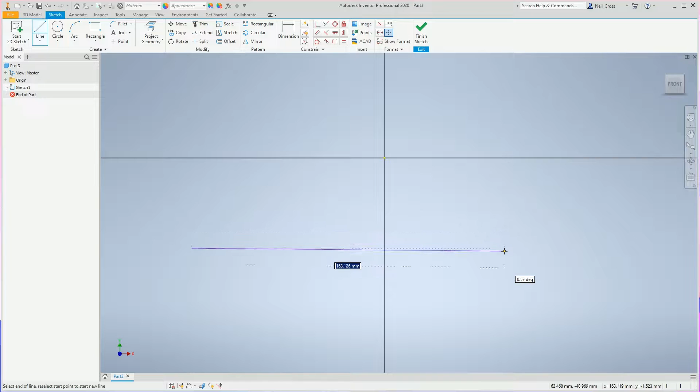I know there's quite a few people from the Autodesk Inventor team that watch these videos. Mate, please, if you get a spare moment, can you just look at this, copy what I do, and see if you can figure it out, please? Thanks, hugs and kisses. It's in the best interests of the product.

Right, first dimension is the center line. I'm going to call it 'main', so that's the name of the parameter. I don't have to do that, you don't have to do that, but it just helps reference it later on for a few bits and pieces.

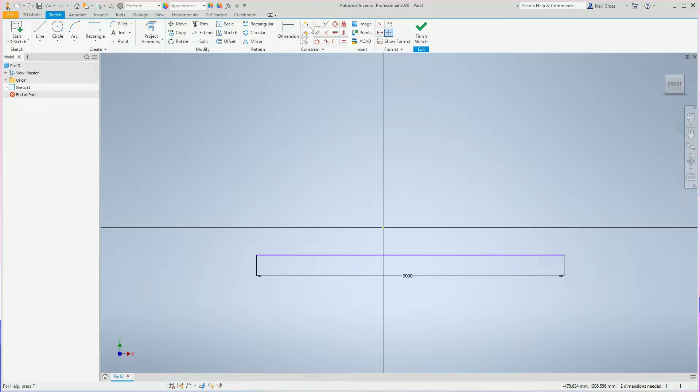So I'm going to coincidentally constrain the center of that to the center of the part, and then draw a construction line going across there. I don't need to do this either, but I'm going to link it to there so it's the same size. Don't need to, but why not?

And then it was, I think, 125. I don't even need to look at my drawing at this point, I've modeled it so many times. Right, turn off construction line.

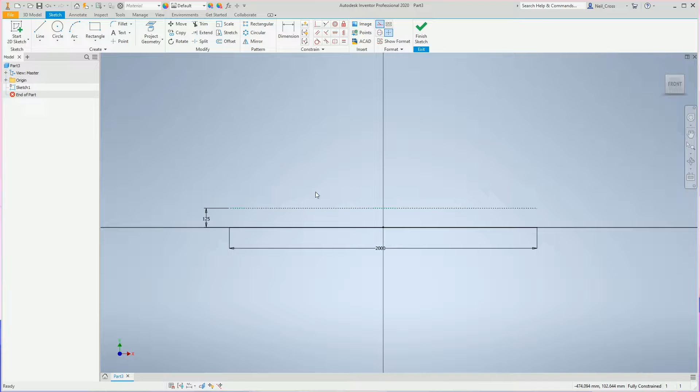I'm going to draw some arcs. This is one of the good things about Inventor, you don't need to draw things accurately straight away, you can just roughly bang things down. And I'm trying to avoid the automatic constraints it puts down.

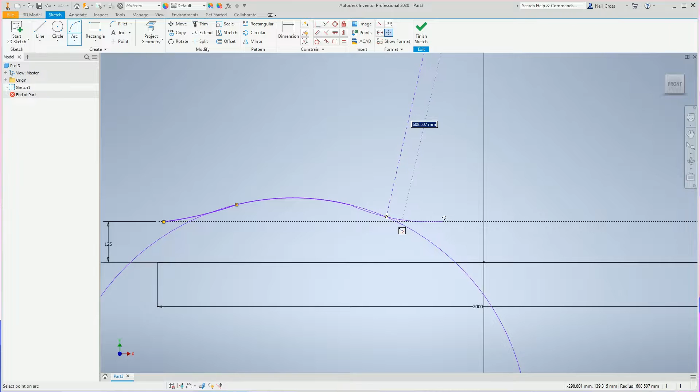I wish it wouldn't do this, this is another thing I find intolerably infuriating. What is it even doing? Why is it drawing a full circle on my screen? I'm sure there's some logic behind that, but you know what it's like, mate.

You're modeling something in the real world, in your job, and these weird things start happening, and you just don't have time to stop and figure out what the hell's happening, or if it's safe to leave it on. You'd rather it wasn't there, and figure it out later, but that later never happens, does it?

Right, so I need to join these two together. I probably should have made that one a little bit larger, never mind. So that's a bit messy, but that's fine.

I prefer to avoid putting automatic constraints down on sketches because I like to know that the constraint is there. I like to know I've put it on, I'm in control, and I'm not left guessing what might have actually happened with weird things occurring as I'm modeling and sketching.

Right, tangent between there and there. So that's the basic foundation of my first sketch, and just a couple more things I need to do. Line it up to there, and then I think that one's already done.

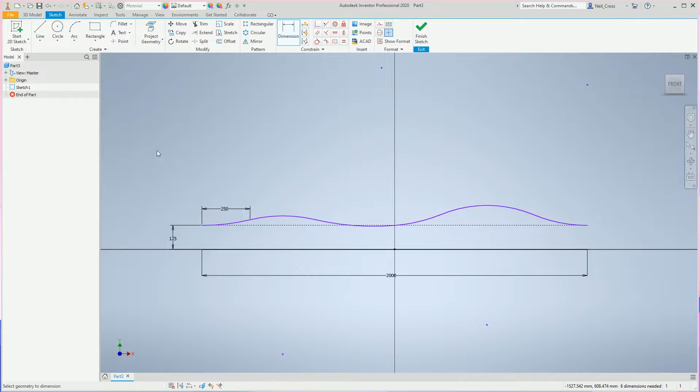Yep, right. Dimensions, so let's drop some sizes down. I think this one was 250, and then from there to there. I think this segment was 500. Oh wow, okay, that just happened.

Let's get rid of that, make it a little bit larger, and let's try that again. I hope it doesn't explode. Okay, that's the way it goes, mate, that's the way it goes.

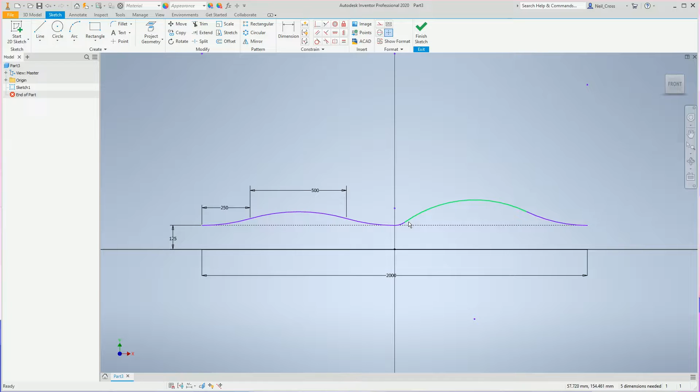I'm getting quite agitated as I'm doing this, and it's my bloody sketch, I came up with it.

And then that's 250, you can just link that. I think that's all I need to do, because I can now drop down the radius of 500 on there, and things start shaping up.

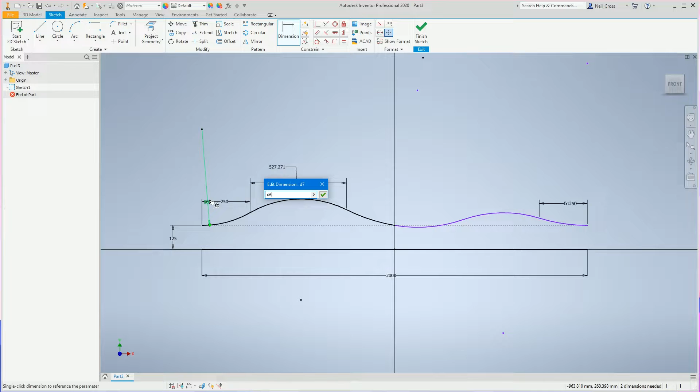And then you're also 500, so that's all black, that's good. And then you're also 500, you're also 500, and then we're all fully constrained. That's all I needed to do.

Right, finish him. Stop zooming in, please, didn't ask for that. Right, revolve.

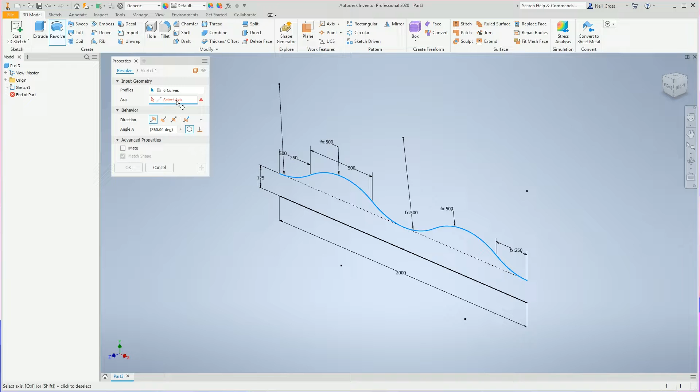Surface revolve, I'm going to revolve this profile around that center line, and then okay, right, that's the construction body for the center coil.

If you've got no idea what I'm doing, it's fine, just bear with me, it'll make sense at the end.

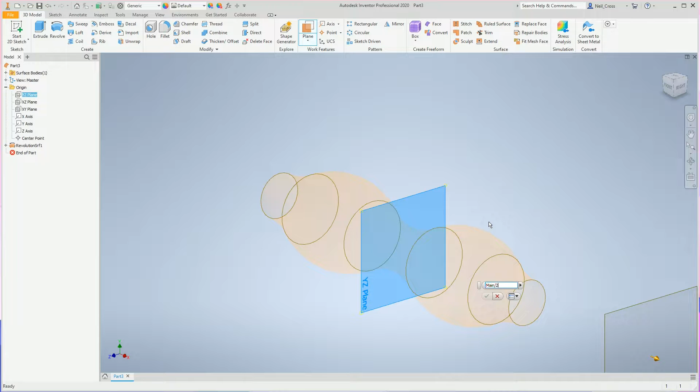Right, I'm going to float a work plane off of the middle, and that's going to be 2000, which is the main value divided by 2. And then that drops a work plane right on the end, so it's bang smack on the start of that sketch profile that I did, which is what I want.

Sketch on the end of him, project through that so I get the center point, and then I'm going to draw a profile line across here of 250. This could be any distance, it doesn't really matter, 250 doesn't mean anything, it's just as long as it protrudes beyond there.

Right, and I also think this is one of the things that changes the end value. So I'm going to have the line coming out to the right on this quadrant. If you do it there, or there, or there, I think you end up with slightly marginally different end values for area and volume in the final part.

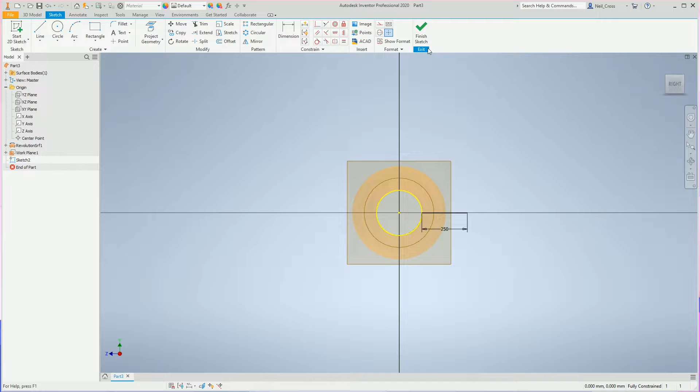Can't explain why, shouldn't be any different, but I've noticed when experimenting with it in different places, I do indeed end up with a different end result. Don't know why. Right, so I'm now going to coil it. I've looked at a few people's parts who sent them in, and a couple did a coil, but most people deviated off from my trajectory at this point.

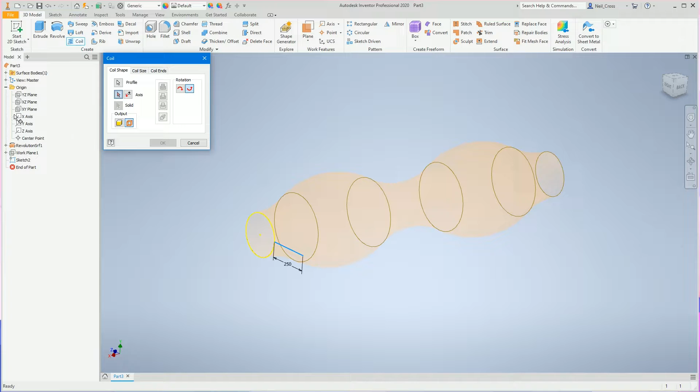So I'm going to coil surface that line, creating a coil using that line, which is something you can't do in Fusion 360. My Fusion talents ended at that point, so I couldn't go any further with Fusion myself. But we'll coil that line around that axis.

We're going to go for revolution and height. The height, so the overall length of the coil is main, which is 2000. We're going for 15 revolutions, and we're going that way.

I spotted a few emails and comments from people saying, mate, I've counted your coil, you've got it wrong, it's 15.5. It's clearly not, it's 15. What's happened is Inventor starts the coil at a consistent point at both sides, and there's an extra bit of material it creates to blend into your profile, like a bit of taper off material. But it is 15 revolutions, you can see it is there.

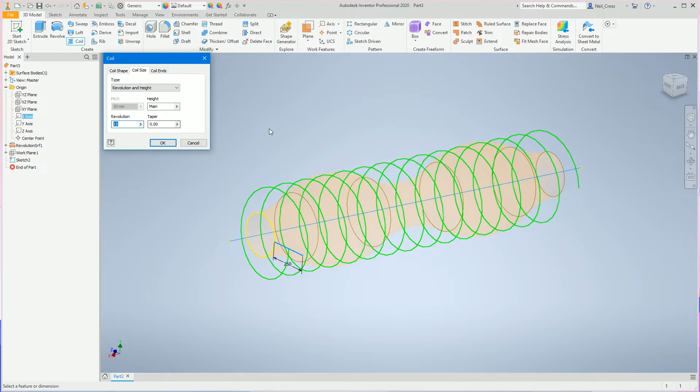The next thing to do is get this bit sorted out, because the start of the coil just comes out at a random angle. So what you've got to do is go into coil ends and change this to flat, with the flat angle at 0. Then the same thing for the end, change that to flat, and set that to 90 degrees, which ensures the termination of the coil transitions straight perpendicular into this flat face here.

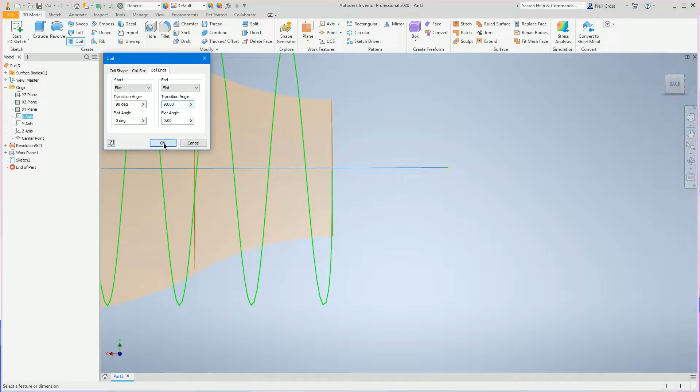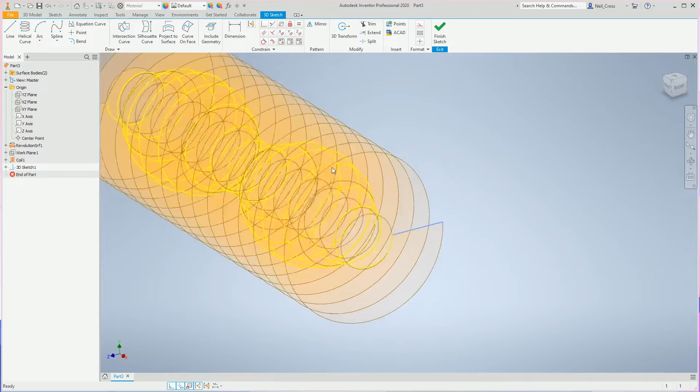We can OK that, and we end up with this funky looking revolved coil, or coiled surface I should say. Then we jump into a 3D sketch, create an intersection curve between here and my revolved body. It basically takes two entities, and where they touch each other it creates a 3D sketch. You can see it's tracking the trajectory of this line as it spins around, and when this point touches the revolved body, it creates an intersection, that yellow line, as a 3D sketch, which is what I want to keep. I can turn off all the other stuff and leave just that - that's the center line of the center coil.

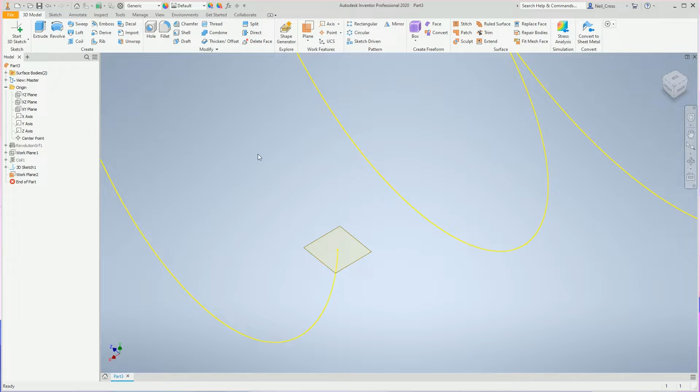So it can create a plane on the endpoint of the 3D sketch, normal to the 3D coil, and then a 2D sketch on that. Oh, for God's sake.

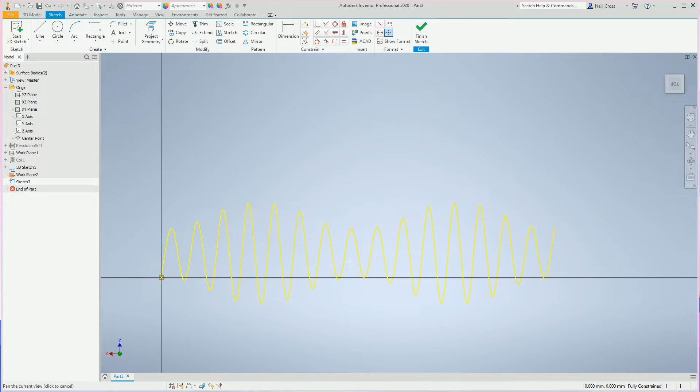Sorry, I'm just going to pause here. Autodesk, where's the logic in this? When I sketch on this face over here, in what world, on what planet do I want to zoom in all the way over here? I know I have the setting on that looks to face, so the camera changes and looks down on what I'm sketching on, but come on, you can put some logic in to stop it zooming all the way over to the middle. Surely if I sketched on this work plane, you know that's where I want to be at.

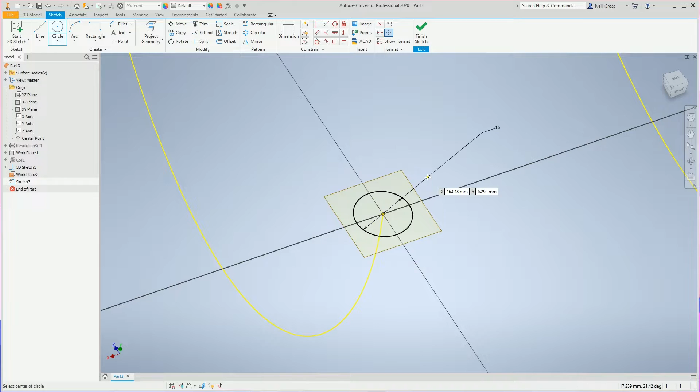Right, never mind, let's get back on track. So I'm going to project the end point of that and then draw a circle, snap into the point, and this one was a 15 diameter. Finish that. I can turn off - no, I'm going to leave on that plane actually for reasons I'll tell you in a second.

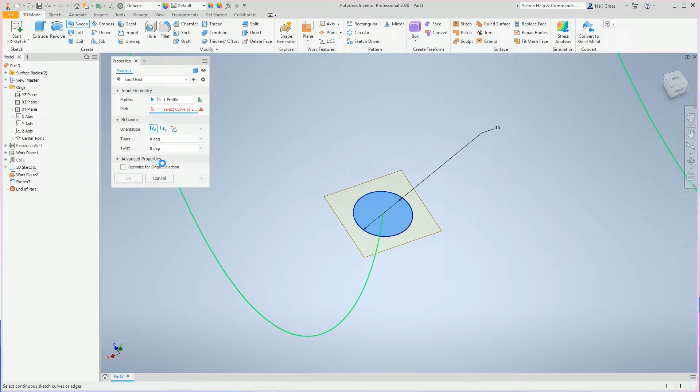Then I'm going to sweep that profile, using the 3D sketch as the path, if it lets me - come on. Profile, that path, there we go. I've come across so many bugs, there's one coming up - it didn't let me pick the path. I've never come across that one, but things like that have been happening as I've been doing this.

One of them is very reproducible, and I'll show you in a second. It's been quite the frustrating thing to do, I've learned a few lessons from this one, if I'm honest. But there you go, there's the center coil.

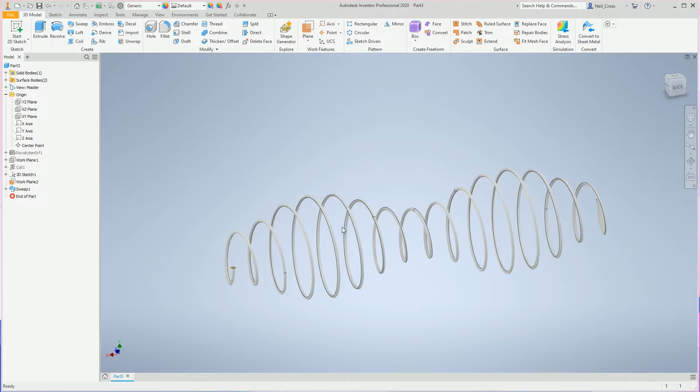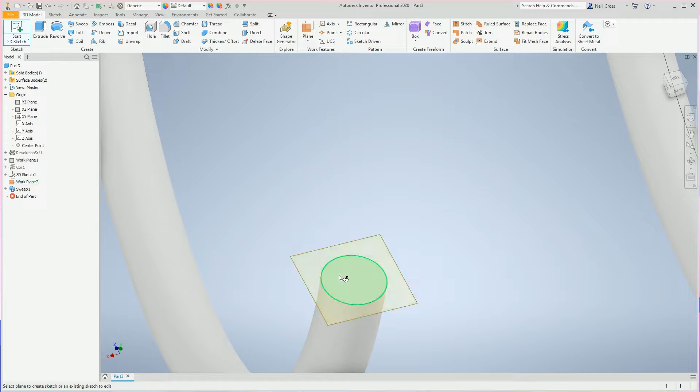The next bit is debatable, because I need to create a 2D sketch for the start point for the two outer coils. You can either sketch on that work plane there or that face there, and I think depending on which one you sketch on changes the end result. I can't explain why, and I don't know which one's right or wrong. So I'm going to use the face.

Love, come on, please, give me a break. Give me a break, so much time wasted.

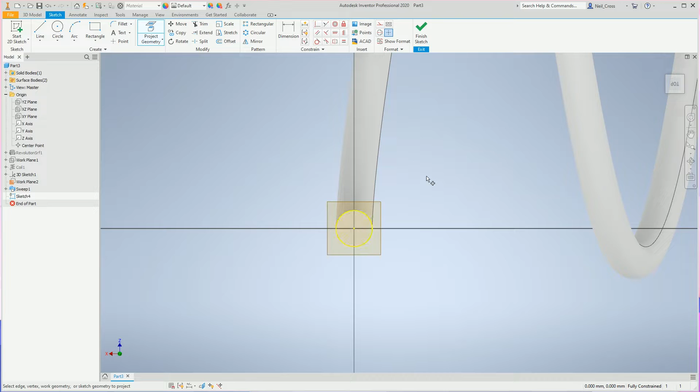Right, project that, and then what a lot of people did is they drew a line across diagonally for the start points of the coils. That's fine. I didn't do that. I created a 2-point rectangle, 50 by 50, and I swept this instead of a line. I don't think it really matters, but this is what I did.

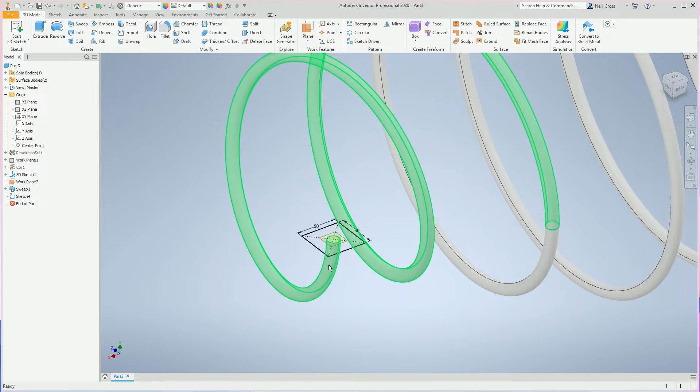Right, this is one of the bugs I've come across. So this 3D sketch here was used by that sweep there, so it's turned it off. Now I can't share a 3D sketch, but I can turn its visibility on, and it's now on, but it's behind this body. It's inside here, but I can use that as a path again. So when I sweep, turn on surface, I need to sweep this profile here, just the square. It will not let me click on it.

It's not picked it up. Now it's jumped to path. If I pick the path, nothing happens. If I jump back to profile and try and pick this, it's now picking up the whole bloody square. I can cancel it, try it again. It will not do it. Profile, surface, pick the profile. Just will not do it. Back to profile, click, it's gone. It will not let me do it at all. I can escape, jump back in, surface, pick it, not picked.

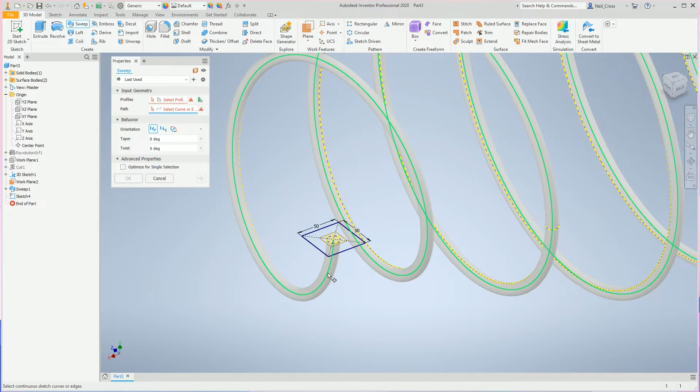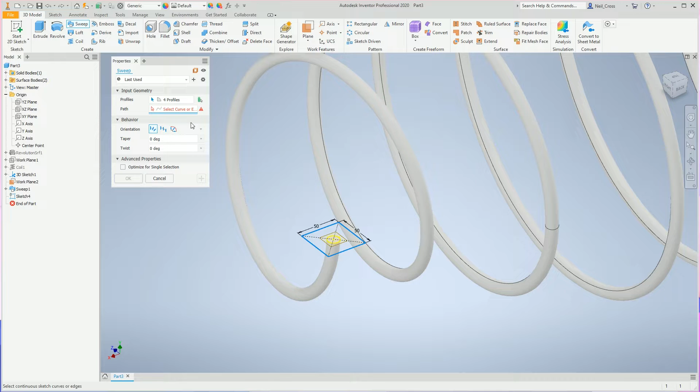However, watch this. This is the bug. Pick that. Nope. Path. That. Go back to profile. Pick that. Right, you get this red. Okay. Undo. Back into sweep. Turn on surface. Now it will let me pick it. I can't articulate how much of my life I lost trying to get my head around that. One day we'll get all of these things ironed out.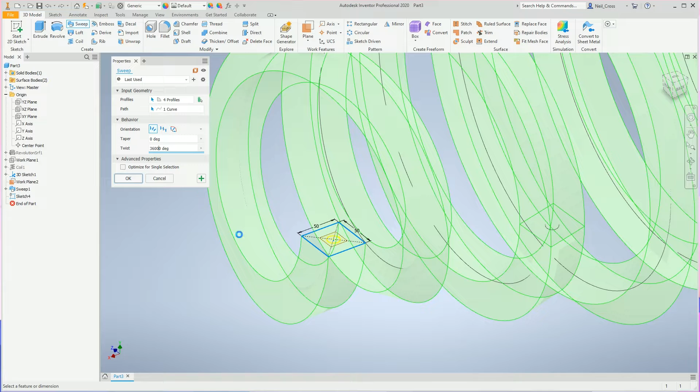Anyway, we're going to sweep the surface. The square is the surface, and we're going to twist it. There's 100 revolutions, so that means a twist angle of 36,000, which is where the CPU killer aspect came in, because it can take quite some time to compute, especially if you accidentally put in one extra zero and it tries to calculate 360,000 degrees of spinning. Okay on that. And that's going to be a swept, spinny, twisty surface, which looks like that.

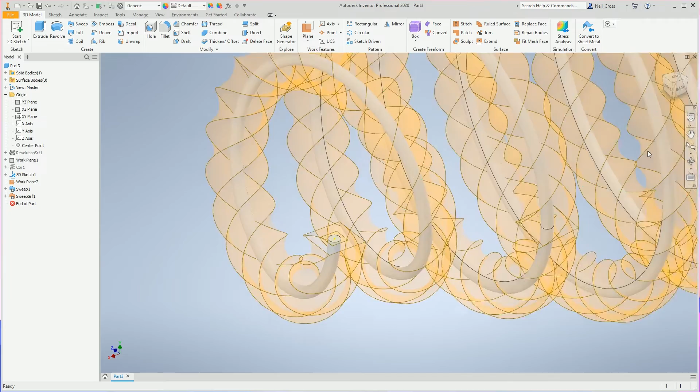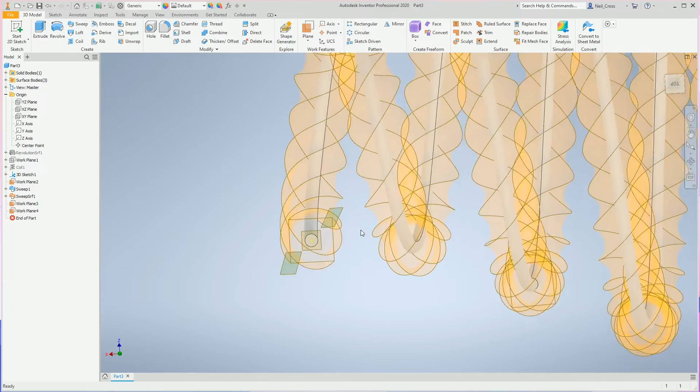Another thing which has an impact on the end area and volume is which one of these corners you use as coil. If you look at my drawing, I've created a view looking top down with this termination point here, so the end face of that coil being here. I think it's that corner and that corner that I'm using. So I'm going to create a plane from there to there. That gives us a sketch plane which is exactly normal to this line here. So I can now create a 2D sketch.

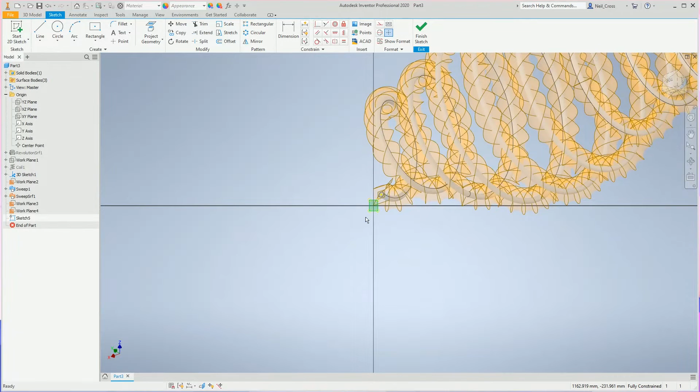This is the CPU going, too much to compute, mate. Right, so sketch on that. Oh, for God's sake, come on, please. It doesn't matter how many times this happens, it makes my brain itch every single time. Oh, you've got to laugh.

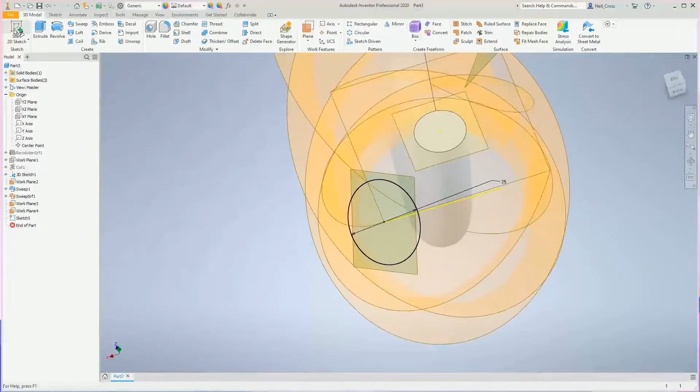Right, project the corner of that sweep, and then we're going to draw the profile for the coil, which was a diameter of 25, and then finish that. That's the first one done. Let that do its bits and pieces, and then I can sketch on that one. Project that, do the same, circle.

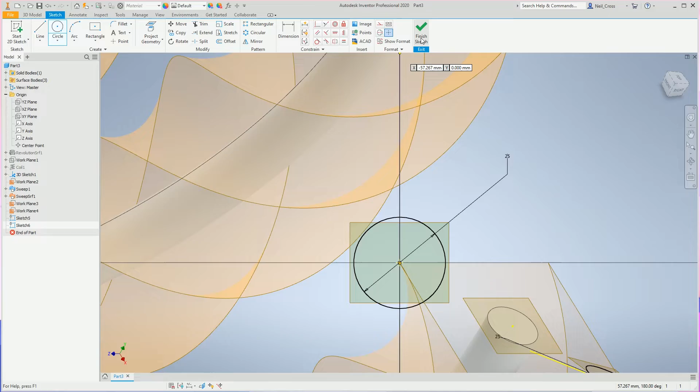Oh, I can feel the computer starting to lag now. Look at that. It's like, mate, you're doing too much, I can't cope. Well, this is an i7-8700K, mate. I don't know what more you want from me.

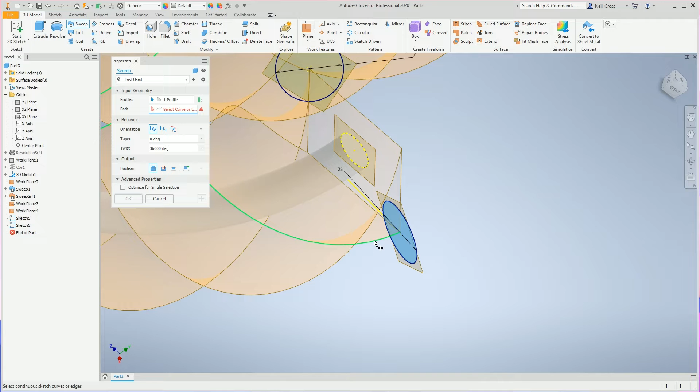That's it. This is where quite a few people got stuck, because a lot of people were sweeping that and trying to use this edge here as the path. That makes sense, but Inventor, for whatever reason, can't do it. Well, it will do it, but you end up with an error. So I got a few emails of people saying, here's my model, I've got some errors, and I know you got it wrong because it's not the right way you do it.

What you do instead is reuse that center path, keep the twist value of 36,000 on, and you end up with exactly the same path as what was there anyway. And then you will get a sweep without an error. Also, this bit definitely makes a big difference to the end result: whether you create this sweep, the two outer coils, as a new solid, or use join so it's all one body, that makes a difference to the volume.

It shouldn't do, because whether it's a new body or whether it's joined in terms of material to the first coil shouldn't make any difference whatsoever, but it does. It's been reported. Autodesk, someone on the team looked at it, reproduced it, just said, yes, that doesn't make any sense, we'll look at it, and I've left them to it.

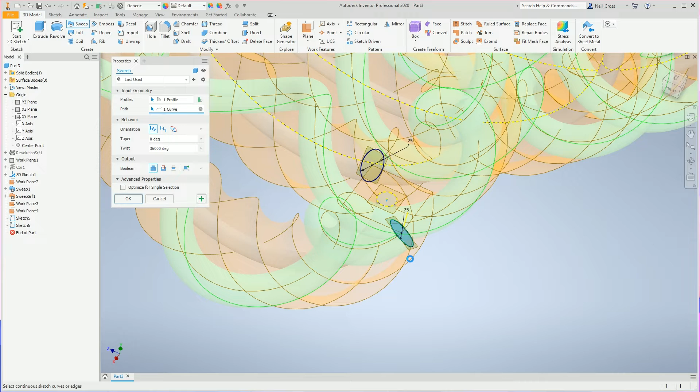So I'm going to assume that nobody created a new solid, because I didn't tell you to do that, so I'm going to just leave it on as join, so everything's just one body. So we'll apply that, because I'm going to have to do another sweep straight away afterwards, so I can just hit apply there, and it keeps the sweep command active after it's done this one. And then we can jump straight into this profile and then reuse that path. Sweep, twist, 36,000 degrees again, and then OK.

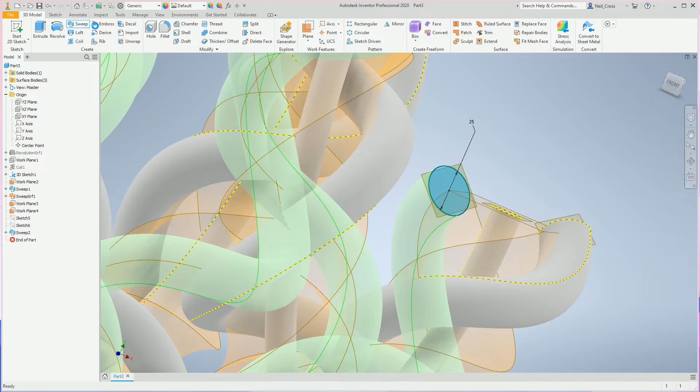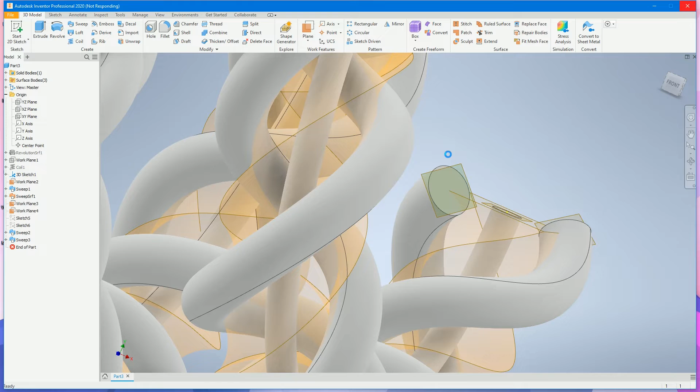And then that's it. All done and dusted, apart from the material, which was copper. So we'll jump into the... and in this case, actually, the material does make a difference, because I saw quite a few results from people who had a very similar area and volume to me, but the mass was way out, and then some people had a similar volume, but there was very massive deviation on all these values. It was quite interesting to see them come through, and also quite frustrating because I can't explain why some things were the way they were.

Right, so I can turn off a couple of these sweeps now. I can turn off that work plane and those two there as well. And mate, that's it, done. That's the end result, finished. So if I jump into the iProperties, I've honestly no idea what this is going to be. No clue. It should be 54414. See, now it's 5441437.313. I can't explain it. It's different to all of the other answers that I've had. I get a different one each time.

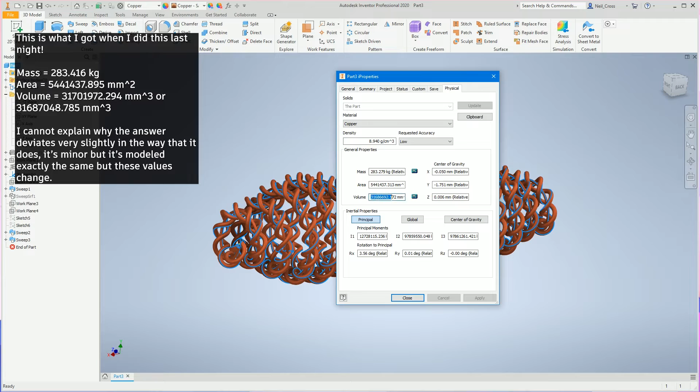And it seems to be where I place sketches, whether I sketch on a work plane or a face, which direction I put the profile in. You end up with the same solid, but it doesn't seem to make any sense. And the volume as well changes very slightly based on whether these two sweeps are additional solid bodies or whether they're joined up. But that's the answer. That one and that one with a mass of

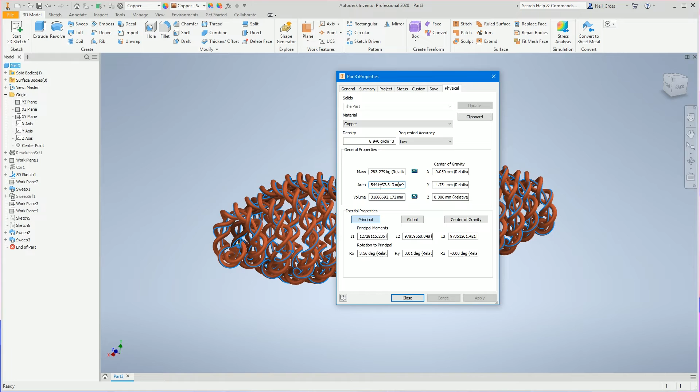283.279. So the logic that I've went with here is if you've got the first 4 or 5 digits right in the area and the volume, I tend to have gone with that, and then the mass of 283. If you're into the 284s and 285s on the masses, I've refused that because that's a whole kilogram, so I had to draw a line on how much tolerance I allowed for right answers. I mean, I can't even get my own model right because the first time I did this, I had 5441440, and now it's 5441437. I can't explain it. If I was to shut this down and do it again on camera, I'd end up with a different answer.

But that was the answer. These people on screen got it roughly right. They were close enough. So congratulations to you guys. Commiserations to everyone else. I know there'll be a few people watching this who are going, but I was still close. I mean, I know you probably were, but I had to draw a line somewhere. But these folks were very, very, very close. And if you used a similar technique to what I did and you're still not shown, it means you were off somewhere. It doesn't really matter that much. But congratulations to everyone that got it right.

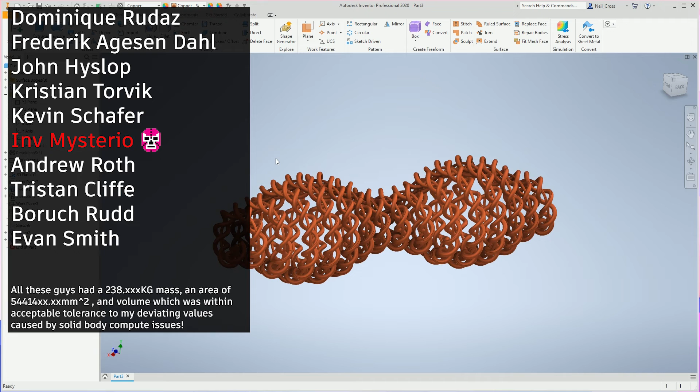Challenge number 4 is going to be very different to the first 3, and you'll see why when I release the launch video, which I haven't even done yet. I haven't even started. Cards on the table, I only came up with the challenge this morning, so I hope it's not going to be a flop, but I've come up with quite a good idea for it, so I look forward to that. Number 4 might stay open for longer than a month as well, because I've got a feeling that it might take quite some time to get this one done, and I think we're looking at even fewer people getting it right. I'm excited for it.